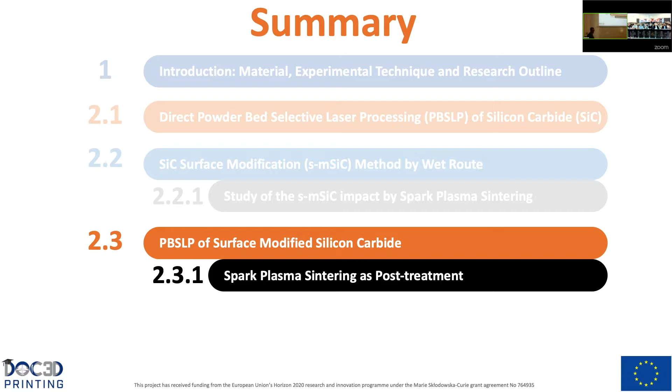We will also study the impact of this surface modification on the sintering behavior. And finally, regarding the experimental part, we will see the powder bed selective laser processing of the surface-modified silicon carbide, and we will use spark plasma sintering as post-treatment.

Then, the third part is the conclusion of the project. And finally, we will see some future prospects and perspectives that we have to face.

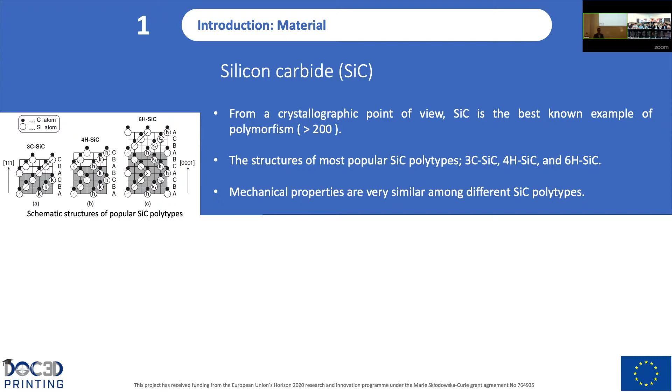So the material that we are using in this work is a ceramic material, silicon carbide, which from a crystallographic point of view is one of the best known examples of polymorphism, with more than 200 polytypes. The most popular structures of silicon carbide polytypes are 3C cubic, 4H hexagonal, and 6H hexagonal. The mechanical properties are very similar among the different silicon carbide polytypes.

Finally, the fabrication of dense silicon carbide parts is commonly done by a method called sintering, for example at Boostec, the company involved in this project, which generally reaches temperatures in excess of 2000 degrees. As you probably know, silicon carbide has unique characteristics such as high elastic modulus, low density, high thermal conductivity, and so on.

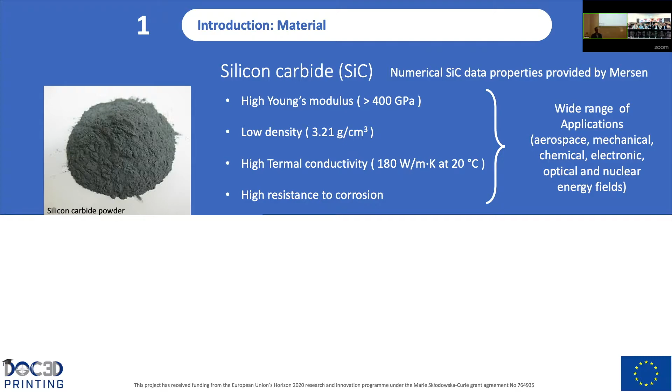This material has become more and more popular in the last decade due to these unique properties, finding a range of applications such as aerospace and the nuclear energy sector, for example. But for specific applications, component design can be improved by additive manufacturing. Among all the additive manufacturing methods, laser-based additive manufacturing is expected to fabricate complicated shapes of silicon carbide in fewer layers.

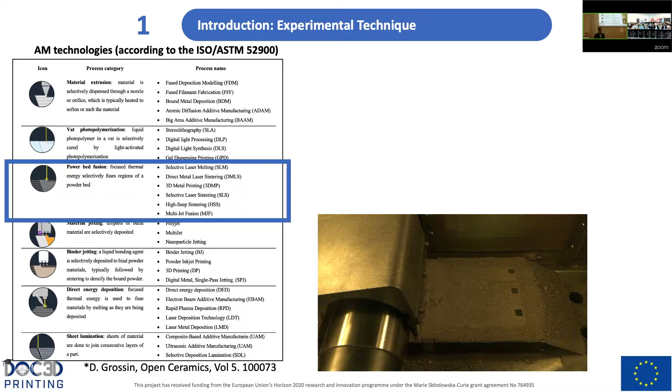In selective laser melting, the powder is transformed from the solid phase into a liquid and then solidifies. On the other hand, in selective laser sintering, particle coalescence - the powder aggregating by diffusion - is accomplished by firing at an elevated temperature.

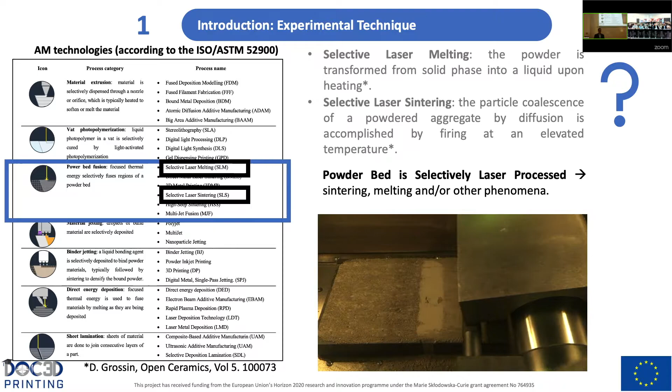In this process, we are not sure which term to use, because a powder bed is selectively laser processed, and both sintering, melting, and other phenomena could occur. For example, if we are using just silicon carbide, since it has no melting point, we should avoid the use of selective laser melting.

But if we are mixing our powder with, for example, silicon powder, which has a melting point, we shouldn't use selective laser sintering. So to avoid misusing these two terms, we decided to create a new term for this technique: powder bed selective laser processing.

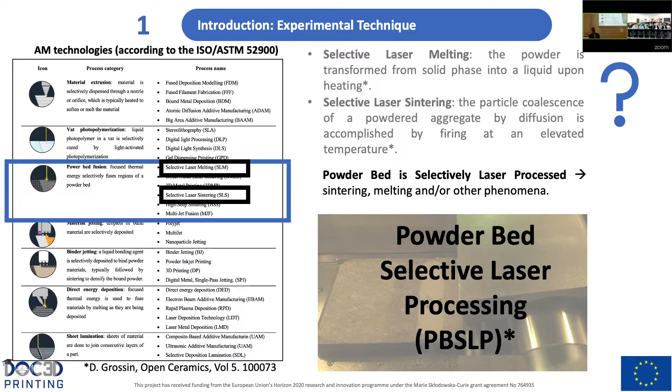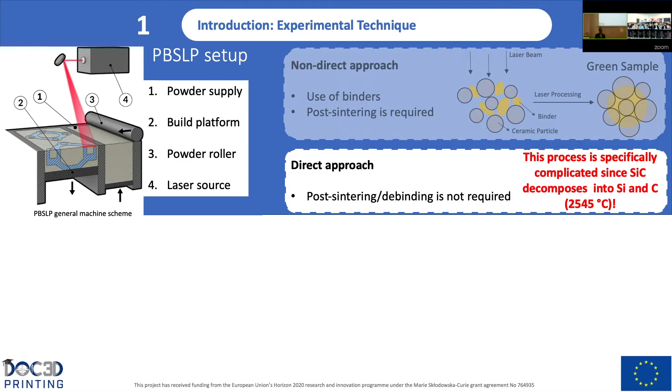But this process is specifically complicated since silicon carbide decomposes into silicon and carbon, as we saw, in excess of 2,545 degrees. Regarding the state of the art of this material and this technique, at present 70% of references are related to the non-direct method and 30% to direct methods.

If we look at the latest strategies followed by researchers and industry for additive manufacturing with powder bed selective laser processing of silicon carbide, initially they used a silicon and silicon carbide powder mixture. After the additive manufacturing process, they obtained a core of silicon carbide preforms.

After performing polymer infiltration pyrolysis of a phenolic resin, which is a precursor of carbon, they obtain a core of silicon carbide carbon preform. Finally, by carrying out liquid silicon infiltration, they obtain a final reaction-bonded silicon carbide.

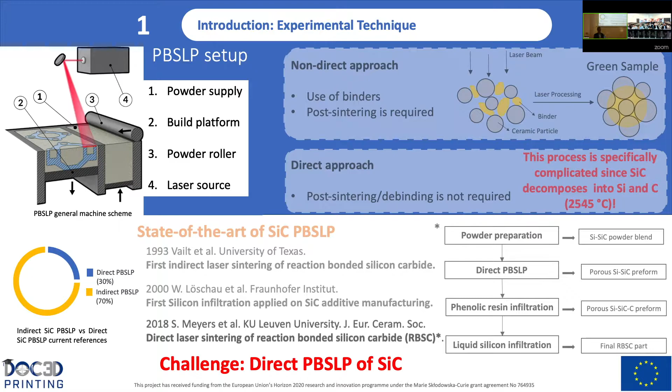So it's still a challenge to achieve direct powder bed selective laser processing of silicon carbide in the absence of additives, or, as we have seen, other initial powders. This is the latest strategy adopted by researchers and some industries.

Since we are obtaining at the end a composite of silicon carbide and reaction-bonded silicon carbide, we have a negative impact compared to, let's say, pure silicon carbide. And at the end of the process, we have some residual silicon content that, for example for some chemical applications, should be avoided.

So what's the original scientific approach of this PhD? Here, instead of using silicon powder, what we want to do is graft a preceramic polymer onto the surface of the silicon carbide.

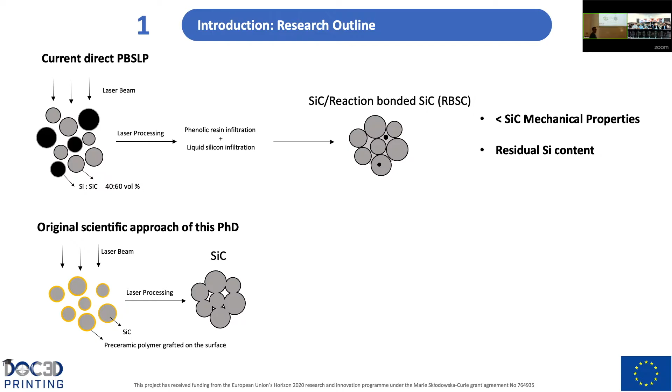So what are the features or characteristics that we need in this preceramic polymer? This preceramic polymer will create a stoichiometric silicon carbide coating via high temperature treatment in inert atmospheres. Then this grafted molecular layer will create a reactive interphase between the silicon carbide grains of the powder, facilitating diffusion and sintering. Next, this will produce the bonding of the ceramic particles without affecting the material phases of our parts.

The main goal of this PhD is the manufacturing of full-density silicon carbide complex shapes by direct powder bed selective laser processing, reaching the properties provided by Marie Skłodowska-Curie requirements of density, hardness, and flexural strength.

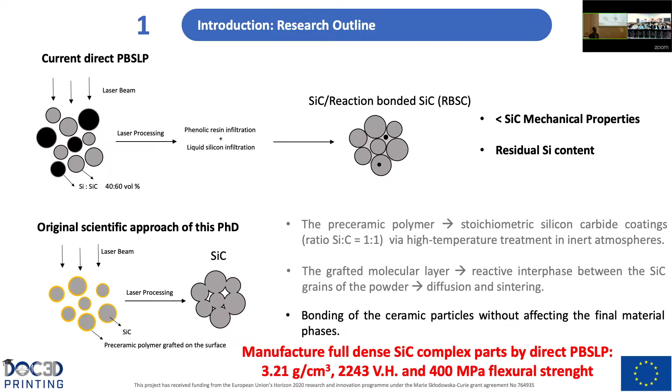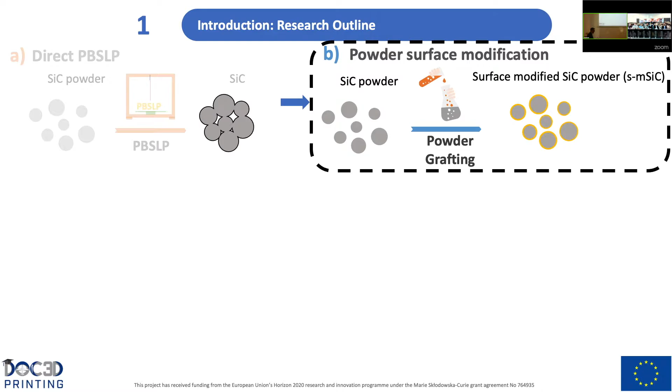So what's the research line that we are going to follow in this PhD? First, we are going to study and optimize the process parameters of powder bed selective laser processing. Then we will look at powder surface modification, with the study of the process parameters and optimizations. After that, we will study the sintering impact of the surface modification by spark plasma sintering, comparing silicon carbide with surface modified silicon carbide.

Finally, we will again use direct powder bed selective laser processing, this time to compare silicon carbide powder and surface modified silicon carbide powder, and we will again use spark plasma sintering as a post-treatment for the manufactured parts.

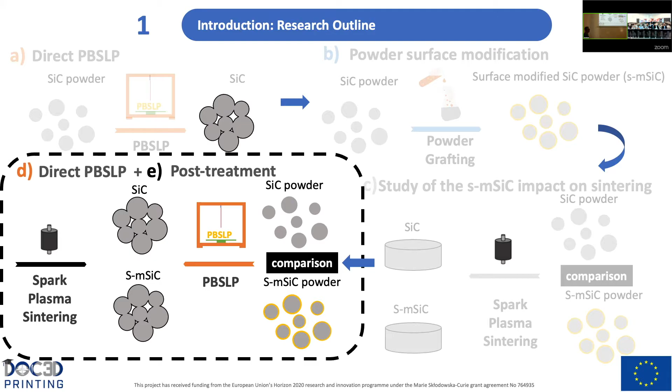Regarding the process parameters of powder bed selective laser processing, there are many parameters involved that have an important influence on the final relative density of the part. But there are 3 key points we need to focus on to assure a successful manufacturing process.

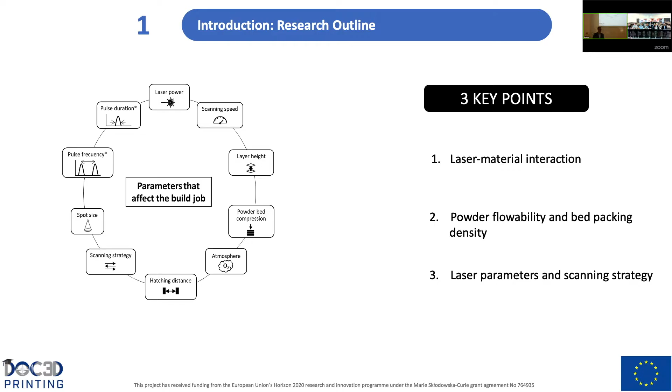The first one is laser material interaction. We need to assure that our material will be able to absorb the energy of the laser. In our case, we work in this wavelength. For metallic parts, we see good absorbance for this process. For other materials such as oxide ceramics, we don't have good absorbance, so researchers have adopted the strategy of adding additives to improve and enhance absorbance so we are able to work with them. For carbide ceramics, we have very good absorbance, so they are ready for this process.

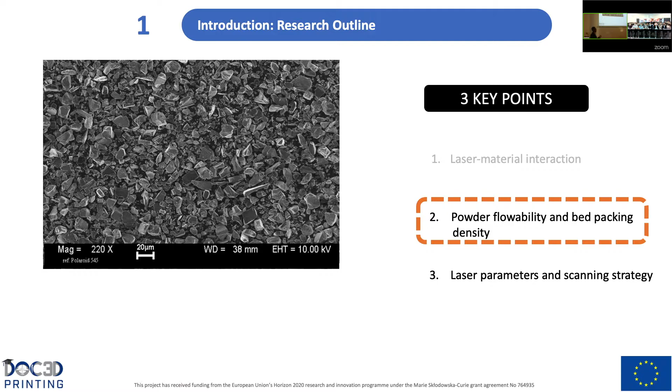And finally, of course, the laser parameters and scanning strategy. The 2 most important laser parameters are the laser power and scanning speed, because they determine the energy density that we are applying to the powder.

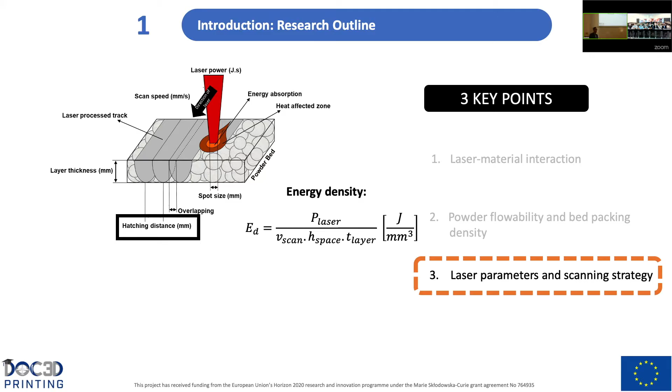Next is the layer thickness, which is the depth of each layer during the process. We need to assure we have a short distance so we interact through all the depth with the laser. And finally, the hatching distance, which is the distance between 2 adjacent laser beam tracks. We need to make sure we don't have too big a distance to avoid regions without treatment, but also that we don't have too much overlapping, otherwise we could have excessive heating and some decomposition.

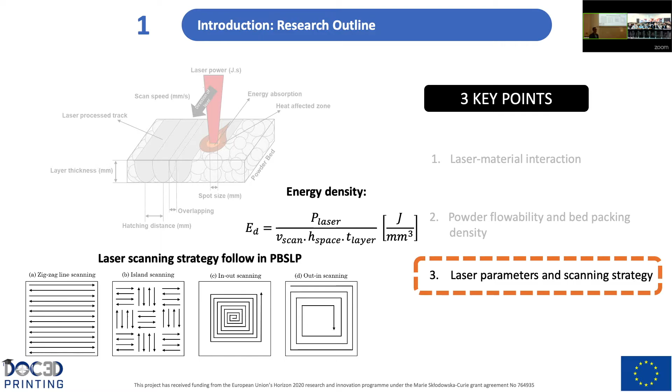And finally, of course, the laser scanning strategy followed in the process, because it determines the distribution of the energy density, and as we will see, it will have a very important role in the optimization of the process.

Now regarding the 3D printers we use in this PhD, this one is not used in this presentation. We use the Orlas Creator 3D printer, which has, as you can see, a circular setup. On the other hand, we have the Phenix Systems ProX, which has a back and forth configuration.

Two more important differences are the spot size, which is bigger here, and in the Phenix system we have a powder compaction system that, as we will see, will also have a very important role in the optimization of the process.

Now regarding the first experimental part, the optimization of the parameters of the powder bed selective laser processing, we were using 20 micrometer silicon carbide powder. All the silicon carbide powder used in this thesis has been supplied by Mersen.

As an optimization criteria of the parameters, we want to achieve the highest reproducibility of intact parts with the highest relative density at the end of the process. Here we can see in black the constant parameters of the process, and in red the parameters of the study that we delimited in a previous study.

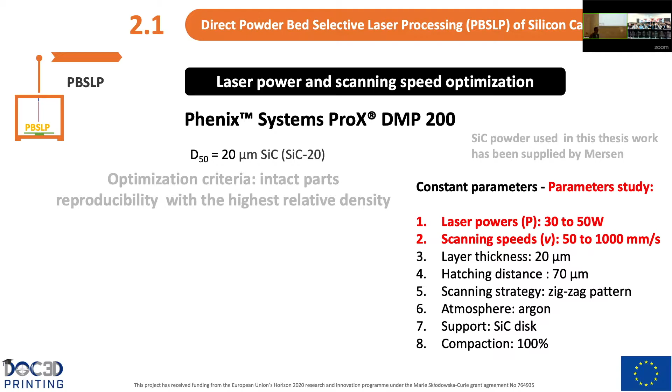Moreover, here in the platform on the 3D printer, in the support, we glue a silicon carbide disc, a support for the manufacturing, to avoid the steel-ceramic interaction and be able to achieve a good manufacturing of the first layer, which is crucial for the process.

So then, regarding the optimization of this kind of strategy, we decided to keep the other parameters constant to just see the effect of the scanning strategy during the process. We use 4 different kinds of strategies. The first one is concentric in-out, following this path.

Then island scanning with hexagonal shapes, following this path. Linear scanning, following this path - each time the laser arrives at the end, it's turned off and comes back to the beginning, repeating the process. And finally, the zigzag, following this path.

So regarding the experimental results, we can observe how different the process is just by modifying this kind of strategy.

Firstly, in the concentric in-out strategy, we can observe a very specific defect pattern. This is because each time the laser changes direction, there is a heat concentration, producing some decomposition.

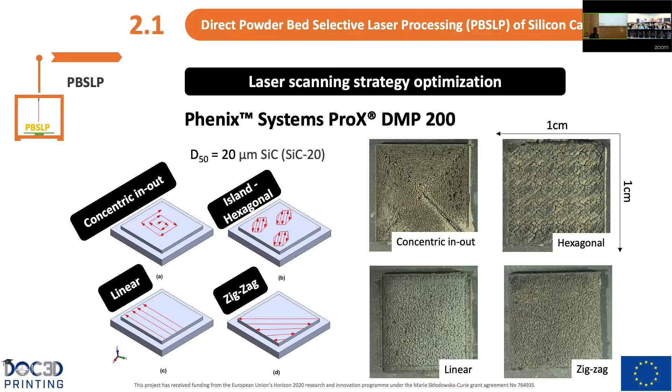Next, regarding the optimization of layer thickness and hatch distance, we achieve good reproducibility and good relative density by using parameters of 20 micrometers layer thickness and 35 micrometers hatch distance, respectively.

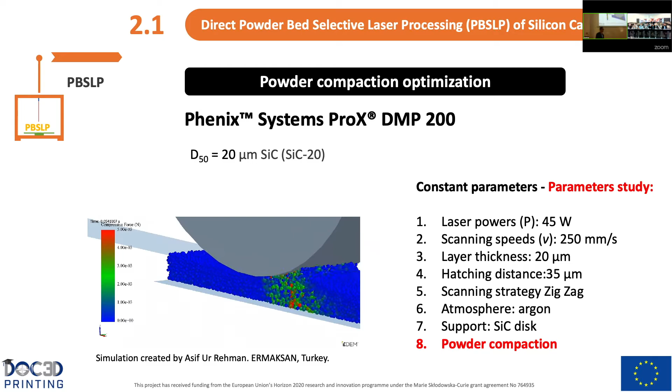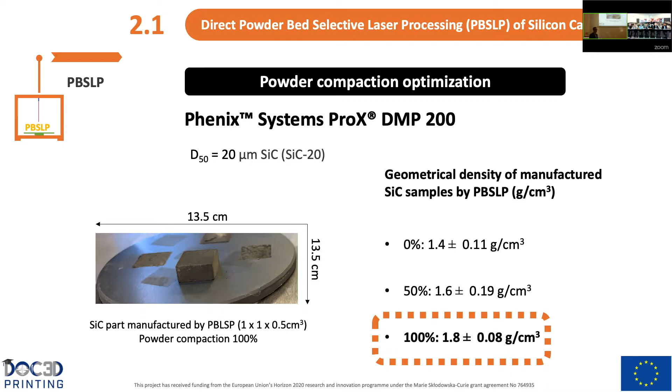Finally, we have to optimize the powder compaction. To do this, we measured the geometrical density of the sample after manufacturing. We used 3 different powder compactions. Here, 100% means that if the layer thickness is 20 micrometers, we compact the full 20 micrometers; in another case only 10 micrometers, and in another, nothing. We obtained the best results in terms of geometrical density with 100% compaction.

Now that we have optimized all the parameters individually, we are able to manufacture samples with high reproducibility and the highest relative density.

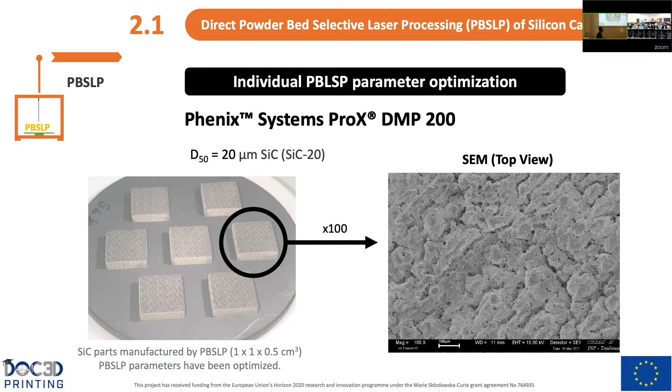Regarding the microstructure of the material, we cannot see clusters of particles or melting regions, nor can we observe specific defect patterns. If we zoom in, we can observe some porosity, but compared to our previous parameters—laser power 45 instead of 38, scanning speed 250 instead of 100, and zigzag strategy instead of hexagonal—we can observe a reduced porosity with the optimized parameters.

In numerical values of density, we are obtaining 81% relative density versus 53% relative density previously.

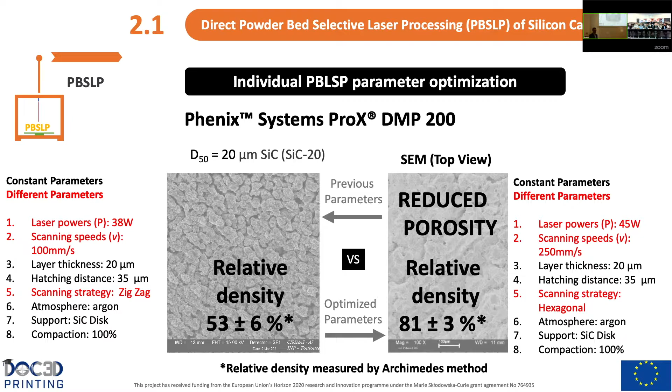But we are also observing some silicon due to the decomposition of the process. By performing the phase composition analysis using the Rietveld method, we can see that regarding the silicon carbide phase, we obtain qualitative similarities between the initial silicon carbide powder and the silicon carbide after the manufacturing process.

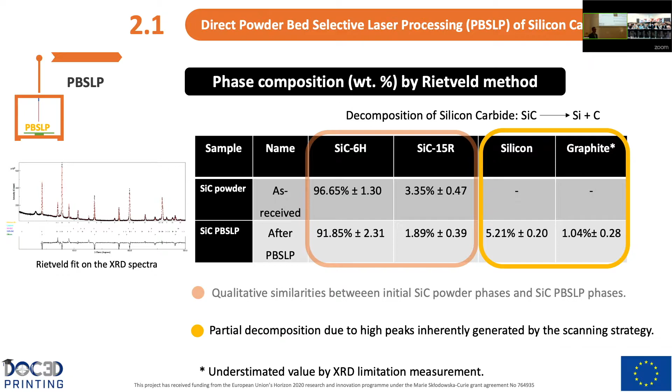We also observe some decomposition into silicon and graphite at the end of the process, due to partial decomposition caused by high peaks inherently generated by the scanning strategy, which we cannot modify. We will address this in the future perspectives and challenges.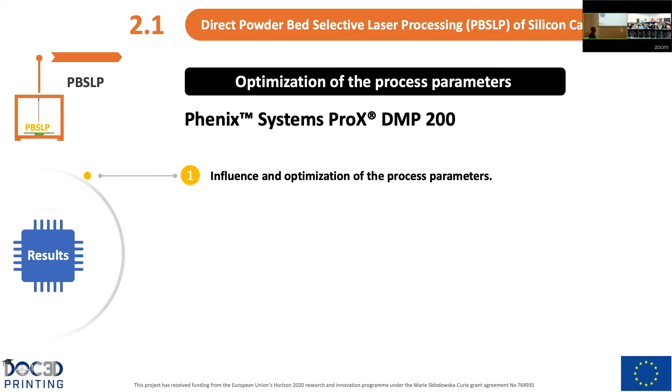From this part, we obtain the following results: we have studied and optimized the process parameters of powder bed selective processing, and studied the effect of the scanning strategy. We have obtained 81% relative density silicon carbide parts. We observed some partial decomposition during the process due to peak inertia generated by the scanning strategy. Finally, we confirm the process viability, as we are now able to manufacture silicon carbide components.

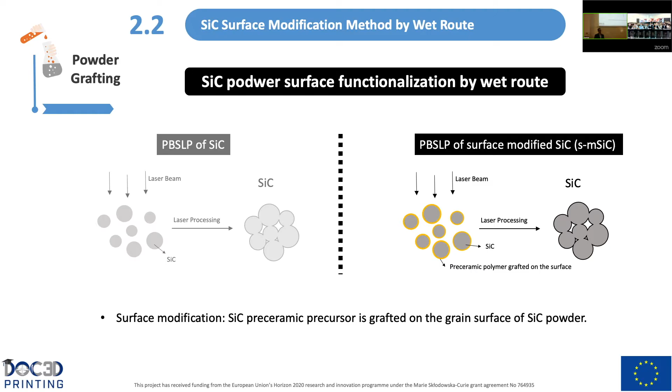Now it's time to introduce the technical scientific approach of this PhD. Having optimized this process, what we want to do is graft a pre-ceramic polymer onto the surface of the silicon carbide powder. For this, we need to perform a surface modification in which the silicon carbide pre-ceramic precursor is grafted onto the grain surface of the silicon carbide powder. This is a potential method to improve the sintering behavior of this ceramic material.

So the ceramic precursor that we are using in this work is the polycarbosilane, which has a commercial name of CVD4000. The characteristic of this commercial ceramic precursor is that the CVD4000 is a carbosilane oligomer, which is used as a molecular precursor in the growth of silicon carbide by chemical vapor deposition.

Moreover, this is a liquid compound, which is flammable in air and moisture sensitive, and highly soluble in toluene, and it's as well handled in an argon atmosphere. And finally, it has a silicon-carbide ratio of 1:1, suitable to form a pre-ceramic polymer in a silicon carbide synthesis.

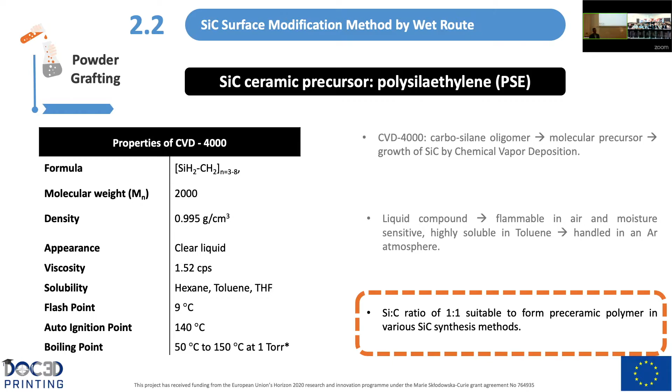So now, what we want to do is know the mass of the polycarbosilane oligomer that we need to graft onto the powder. For that, we develop the following model hypothesis. Firstly, the silicon carbide particles are mono-dispersed and spherical.

Then, the formula of the polycarbosilane has an index of 5. Next, the surface occupied by one grafted molecule is the surface projected by a molecule attached perpendicularly to the silicon carbide surface. And finally, the polycarbosilane polymer can only be attached on the silicon carbide surface and not on a fresh molecular polycarbosilane.

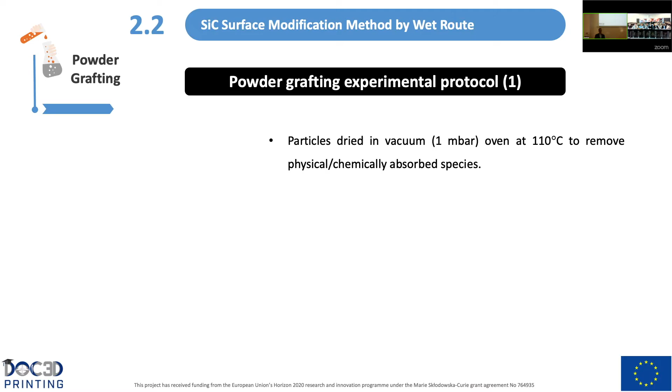So now regarding the powder grafting experimental protocol, by reviewing the literature, we use the following protocol. Firstly, the particles are dried in a vacuum oven at 110 degrees to remove physically and chemically absorbed species.

Then this suspension of polycarbosilane, toluene, and silicon carbide is subjected to 5 minutes of manual agitation to improve the oligomer solubility and homogeneity, and it's subjected as well to an ultrasound bath for 10 minutes at room temperature.

And actually, regarding the expression of mass, it's very important not to use an excess of polycarbosilane during the process. Why? Because this could decrease the powder flowability.

So we wouldn't be able to use this powder, this ceramic, in an additive manufacturing process such as powder bed selective processing. Moreover, this could increase the specific surface area, producing a change in the morphology, and the coupling agent would hardly penetrate into particle agglomerates.

Next is the wet functionalization. Here we are going to transfer the suspension into a vacuum gas manifold under argon and subject it as well to magnetic stirring for 1 hour at 60 degrees.

Following this step, the suspension is again transferred to a rotary evaporator, and here the toluene is removed by evaporation under moderate vacuum conditions at 60 degrees. And actually after this step, we can take our silicon carbide back as dry powder.

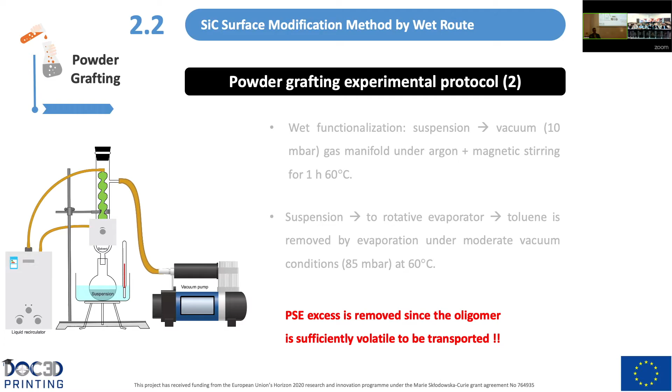But actually, if we are using some excess of polycarbosilane, it won't be a problem because it will be removed since the oligomer is sufficiently volatile to be transported.

Regarding the grafting process parameters' influence, because for example we were saying we were using ultrasound, we were using 60 degrees of temperature for the process, here we were using infrared characterization to know and study the grafting efficiency of the process.

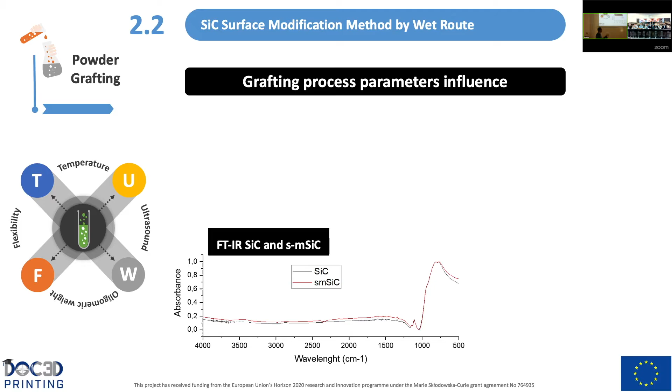But actually, if we focus on the infrared spectrum of silicon carbide as received and surface modified silicon carbide, in this region, since we are using a very weak oligomer content, we cannot detect the signal of this oligomer, and yes, we can see the silicon carbide peak.

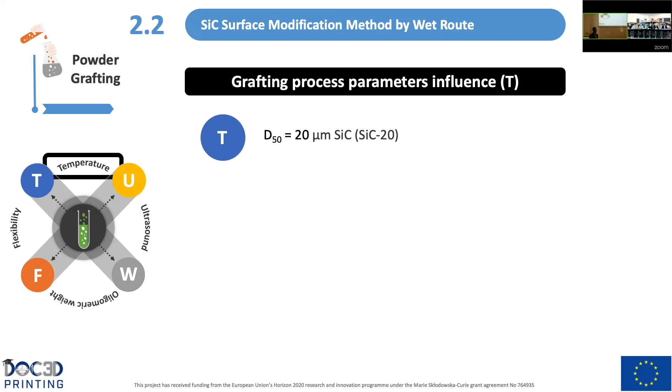So regarding the optimization of temperature, here we were using silicon carbide powder of 20 micrometers, and we were using 4 different temperatures: 80, 60, 40 degrees, and room temperature.

And effectively, we can observe that in the silicon carbide powder, we can observe this peak after the process. So actually, regarding the intensity ratio, that's the ratio between the silicon carbide peak intensity and the silicon-hydrogen grafting peak intensity, we can see that at temperatures of room temperature and 40 degrees, we cannot observe an important increase.

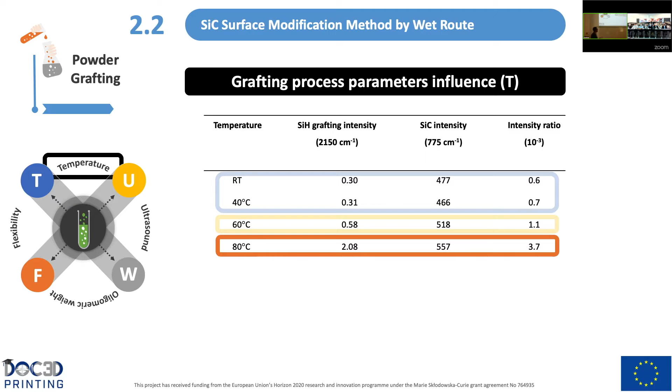By increasing the temperature to 60 degrees, we observe an important increase in intensity ratio. But by increasing to 80 degrees, compared to the other values, we observe a huge increase of the intensity ratio. So why aren't we using 80 degrees instead of 60 degrees?

Because after the surface modification process, at 60 degrees we have the silicon carbide in powder form, but at 80 degrees, instead of having the silicon carbide in powder form, we are forming silicon carbide plates because the temperature leads to some cross-linking. Since we don't have the ceramic in powder form, we are not able to use it in the powder bed selective process.

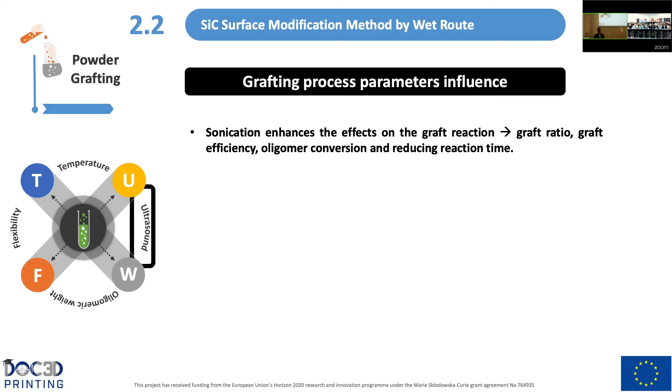So we also optimized more parameters. For example, regarding ultrasound, we saw that sonication enhanced the effect on the grafting by increasing the graft ratio, the graft efficiency, the oligomer conversion, and reducing the reaction time.

Next, we studied that a large excess of oligomer grafted and polymerized on the surface of the powder decreases the grafting performance, as is reported in literature.

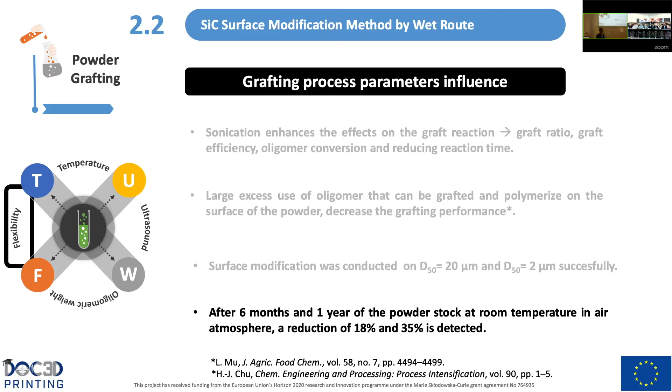Regarding the flexibility of the process, we conducted surface modification of two different silicon carbide powders, 20 micrometers and 2 micrometers. Finally, after 6 months and 1 year of powder storage at room temperature in air atmosphere, a reduction of 18% and 35% was detected in the grafting efficiency.

So regarding the results of this part, we have studied the effect of the process parameters: temperature, ultrasound, and oligomeric weight. We used infrared characterization to study the optimal conditions to conduct this process.

Next, we observed that the surface modification shows good reproducibility. We performed this surface modification on 20 and 2 micrometer silicon carbide powder. The surface modified silicon carbide powder does not allow a big delay in time in its application. Finally, this is a method that will potentially improve the sintering behavior of the silicon carbide, as we will see in the following section.

So now it's time to study the impact on the sintering behavior of the powder from this surface modification. For this, we are going to use two different powders, 2 micrometers and 2 micrometers silicon carbide powder after the surface modification, and evaluate the sintering behavior.

We are using spark plasma sintering because this is a favorable method for sintering silicon carbide, as reported in literature, and it provides fast heating and short sintering times.

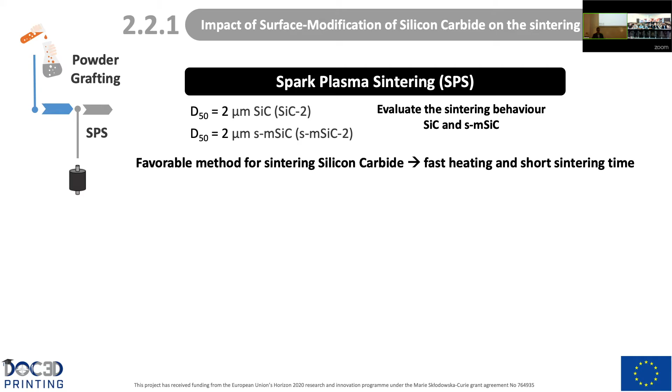This is the setup for the sintering. It's a sintering technique which uses pressure driving powder compaction, in which a pulsed direct electric current passes through the sample. With the powder, we are going to manufacture silicon carbide pellets with 6 mm diameter and 2 mm thickness.

To understand what we have in the graphite die, here is the graphite die. First we place a graphite foil, then we place a graphite die. After we put the silicon carbide or the surface modified silicon carbide inside the graphite die, and finally another graphite die on top.

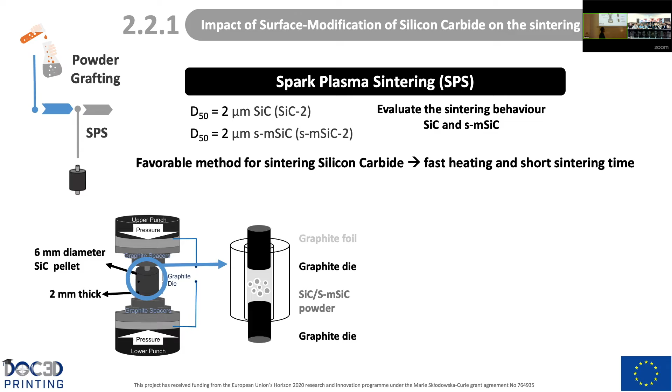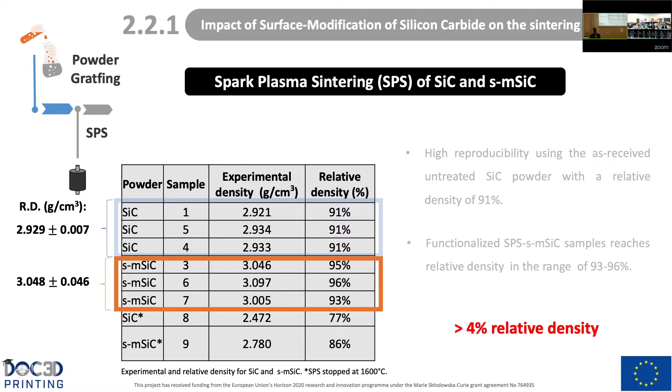Now regarding the relative density of silicon carbide versus surface modified silicon carbide, we observe high reproducibility using the powder as received, with a relative density of 91%. On the other hand, using the functionalized surface modified silicon carbide, the sample reaches relative density in the range of 93 to 96%, very close to full densification. So we are increasing the relative density by an average of 4% by using surface modified silicon carbide.

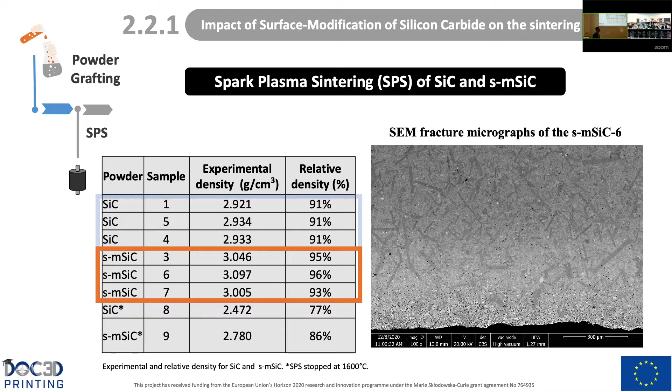Regarding the microstructure of the material, we observe some porosity increasing at the edges, and we can see brighter and darker areas. Comparing with the microstructure of the surface modified silicon carbide, again we observe porosity increasing at the edges of the part, and again brighter, darker areas, but we observe similarities between the two microstructures. If we zoom into this part and perform EDS scan analysis to determine what these brighter, darker areas are, we cannot observe any change in the composition.

So actually what we have here are different crystallographic orientations of different silicon carbide polytypes.

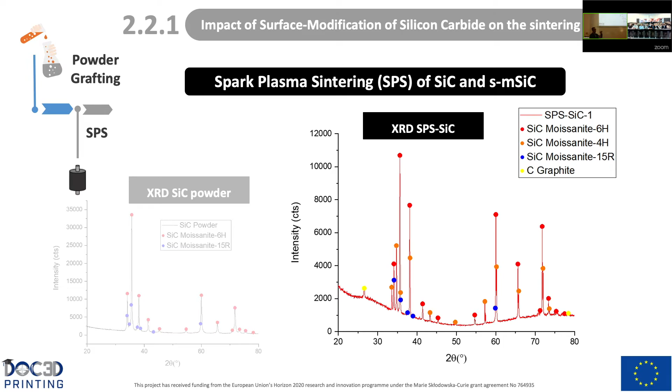Now regarding the XRD spectrum to know the phases of this material, here again the powder as received. If we compare with the silicon carbide after spark plasma sintering, we can observe moissanite 6H and 15R raw material like the powder, and some graphite due to contamination of the graphite die that we are placing in the beginning. But actually here we observe a new phase, silicon carbide 4H, that is not present in the powder.

If we compare with the surface modified silicon carbide after spark plasma sintering, again 6H and 15R raw material like powder as received, graphite due to contamination, but again 4H is present. So actually we have similar material phases present in both powders.

So regarding the phase composition, again by Rietveld method, here we observe similarities with the silicon carbide powder and surface modified silicon carbide powder. And effectively, for the silicon carbide and surface modified silicon carbide after the spark plasma sintering, we are observing some transformation from 6H to 4H. But actually we are not able to observe this phenomenon in powder that we stopped at 1,600 degrees.

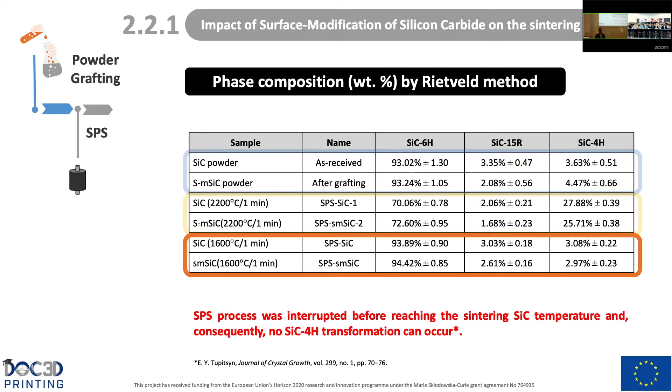Actually, here we cannot observe this transformation from 6H to 4H. Why? Because actually the spark plasma sintering process was interrupted before reaching the sintering silicon carbide temperature, and consequently no silicon carbide 4H transformation can occur, as it is reported in detail.

So now we are going to use the silicon carbide and surface modified silicon carbide experiment that we stopped at 1,600 degrees to study the sintering of both powders. So for this, here we can see the profile of temperature and displacement, and actually a change in the displacement curves, as we can see here, means dimensional shrinkage of the powder.

Specifically for the silicon carbide powder, this is happening at 1,240 degrees, and for the surface modified silicon carbide at 1,060 degrees. So actually, we observe that the sintering process initiation has a difference of 180 degrees. But why? What is happening here?

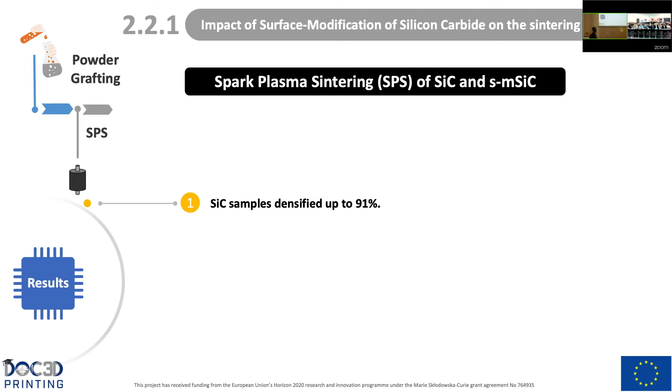So from this part, we can obtain the following results. First, we have densified a silicon carbide sample up to 91%. On the other hand, surface modified silicon carbide densified up to 96%. Remember, with the same spark plasma sintering conditions.

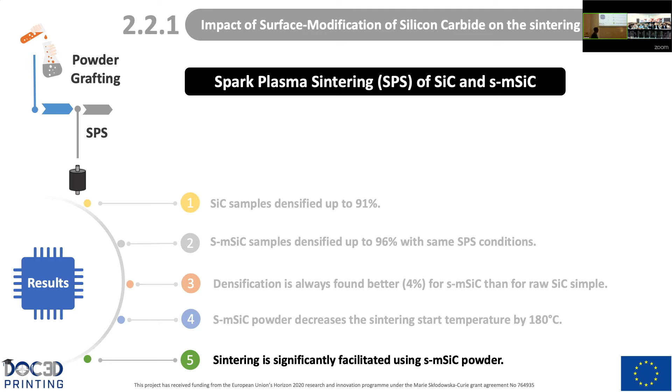Next, the densification is always better, in a range of 4%, for surface modified silicon carbide compared with the silicon carbide sample. And actually, the surface modification decreased the sintering start temperature by 180 degrees. And finally, the sintering is significantly facilitated using surface modified silicon carbide.

So now it's time to compare with the additive manufacturing technique, the silicon carbide and the surface modified silicon carbide. So regarding what we've seen, effectively with the surface modification, we are enhancing the sintering behavior.

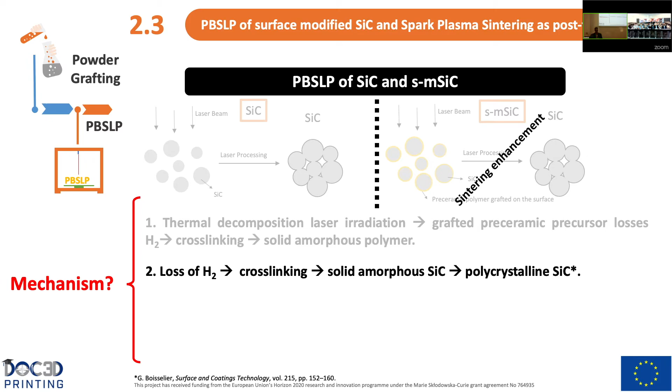So what's the mechanism? Why do we expect to improve the process with the surface modified silicon carbide in the selective laser sintering process? Because actually, by thermal decomposition due to laser irradiation, we'll create the grafted preceramic precursor. We will lose hydrogen, leading to cross-linking, and we create a solid amorphous polymer. Then, by continuing this loss of hydrogen, leading again to cross-linking, we will form a solid amorphous silicon carbide that will be converted into polycrystalline silicon carbide, as it is reported in literature.

Next, this grafted molecular silicon carbide hydrogen layer will create a reactive interface between silicon carbide polymer grains, facilitating diffusion of sintering. And finally, this will produce the bonding of ceramic particles without affecting the material phases, making the debinding process unnecessary and actually fulfilling the original conversion into silicon carbide.

So regarding the parameters that we use for the silicon carbide to do this comparison, here are some of the parameters, and maybe you're asking why we are using 50 instead of 45 as we used in the beginning. Actually, we can discuss this after, but at this point, we hadn't started yet the collaboration with the colleagues from Turkey, and we found this value to be the best one for the process.

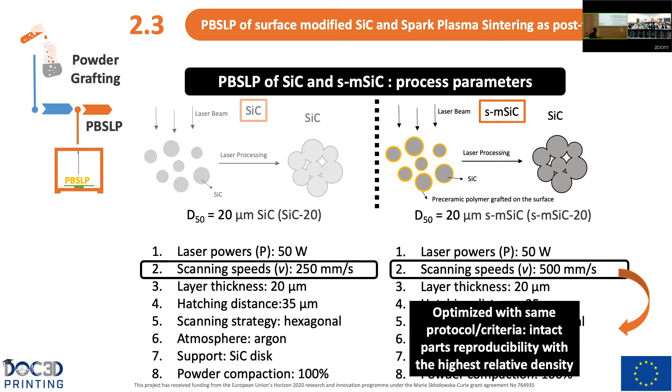Comparing the surface modified silicon carbide, here we have exactly the same parameters, except for the scanning speed, where we are using 500 instead of 250. Why? Because we were following the same protocol criteria to optimize the parameters. And we observed that by using this scanning speed instead of the other one, we were reaching parts with highest reproducibility and highest relative density. In numerical values, actually, 65% relative density versus 71% relative density.

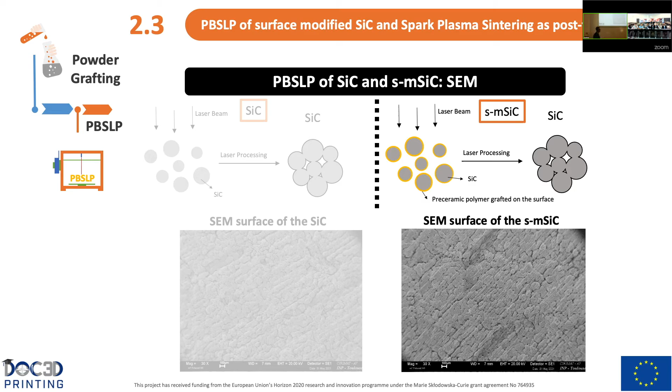Comparing with the surface modified silicon carbide, again, no cluster of particles, no melting, no specific defect patterns. So actually, we have microstructural similarities at this scale.

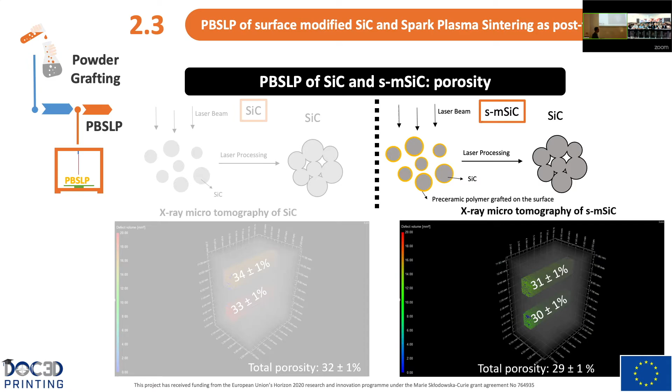Regarding the porosity of the silicon carbide after the process, by performing X-ray microtomography, we obtain a total porosity of 32%, compared with interior values of regions of this part, 33 and 34%, very close values. In comparison, the surface modified silicon carbide has a total porosity of 29%, with interior volumes of 30 and 31%. So here we are improving, decreasing the porosity by 3% by using surface modified silicon carbide. But remember that we are using 500 millimeters per second instead of 250 millimeters per second.

I want to highlight that by using this scanning speed for the silicon carbide without surface modification, we will obtain parts without reproducibility and with a lot of defects.

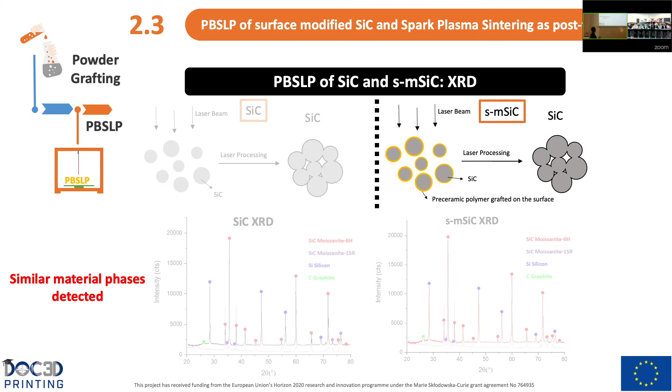Here we have the phases of the material, the XRD spectrum. For the silicon carbide, again as we have seen, two phases like the powder as received, and two due to the decomposition. Regarding the surface modified, again two like the powder as received, and two phases due to the decomposition. So actually here we have similar material phases in the respective parts.

So the next step, once we have performed the additive manufacturing method and obtained our parts, we are going to use spark plasma sintering as post-treatment. Why? Because actually we can use this post-treatment to treat complex shapes.

Here we have the setup of the machine. Again, we manufacture 20mm diameter silicon carbide and surface modified silicon carbide pellets with powder bed selective laser processing, with 2mm thickness. And for the graphite die, we are going to fill the empty space with graphite powder.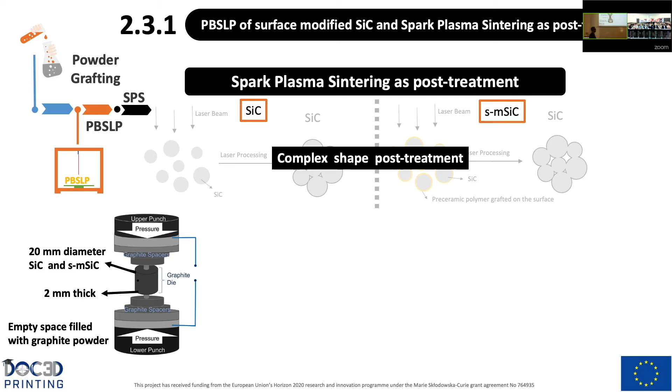To zoom in on the graphite die, here again we are going to place a graphite foil, then a graphite die. As we have seen, we are going to put some graphite powder. Then we will place the silicon carbide or the surface modified silicon carbide part manufactured by additive manufacturing. Then again, some graphite powder, and finally the graphite die. We are going to follow exactly the same experimental path that we used in the previous experiment.

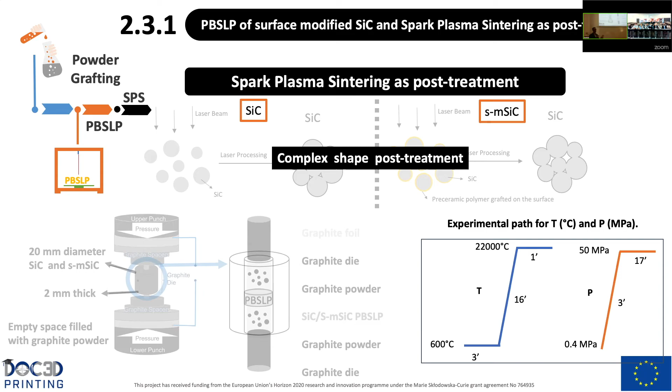Regarding the microstructure of the silicon carbide after post-treatment, here we can observe a reduced porosity comparing this sample with the previous one manufactured by additive manufacturing. Very similarly, for the surface modified silicon carbide we can observe a reduction in the porosity as well. So actually here again we have some microstructural similarities at this scale.

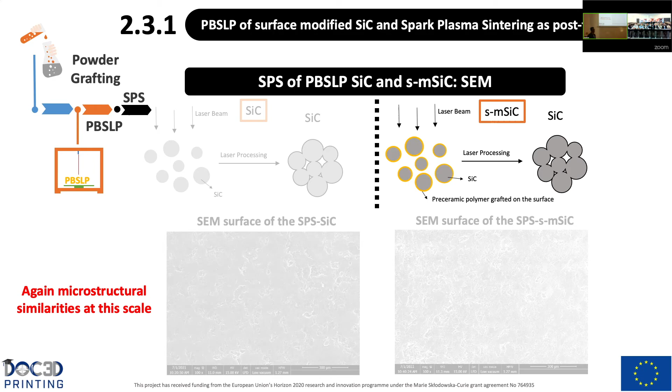Next point is to study the porosity after the post-treatment, again by using X-ray tomography. So here we are obtaining 27%. If we compare before spark plasma sintering, it was 32%. So we are decreasing the porosity by 5%.

And regarding the surface modification, 21%. Remember before it was 29%, so here we have a reduction in porosity of 8%. So comparing the surface modified silicon carbide and silicon carbide, we have a 5% difference in porosity, a similar value to what we obtained before. With spark plasma sintering, we are able to decrease the final porosity of the sample by up to 8%. Remember, we can treat complex shapes of silicon carbide.

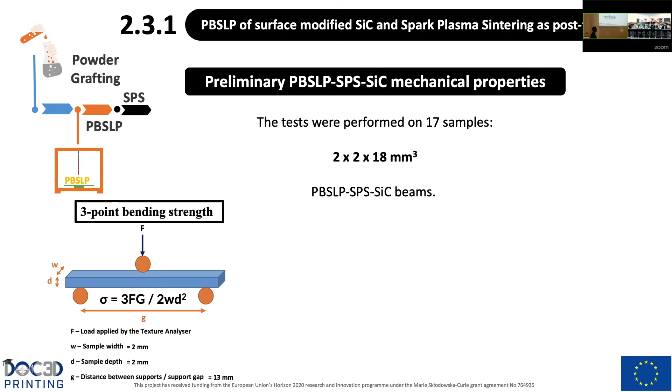So next, we performed some preliminary mechanical properties testing, but we only had time to test the silicon carbide, not the surface modified silicon carbide. We used 17 samples with specific dimensions. First, we wanted to study the flexural strength by using 3-point bending tests.

We obtained a value of flexural strength of 137 megapascals, with a porosity of 27% and a silicon content of 15%.

If we compare this value with the last strategy we were explaining in the first slide, the additive manufacturing by laser sintering of reaction-bonded silicon carbide, we obtain a similar value, despite the fact they don't have any porosity. They obtain full density values with similar content. So probably by decreasing this porosity, we could get closer to or even achieve a better flexural strength.

But actually, if we compare with the value provided by Mersen Boostec, we are still a bit far, and we have to work in this sense.

Regarding the Vickers hardness, here we were using an indentation load of 4.90 newtons, and actually we obtained a value of 2,200, with a porosity of 27% and silicon content of 15.

Again, if we compare this value with the same last strategies adopted by researchers, they are obtaining a similar value, but a bit smaller, probably because remember they are obtaining a composite of reaction-bonded silicon carbide. So as we said, this has a negative impact compared to pure silicon carbide at the end of the process.

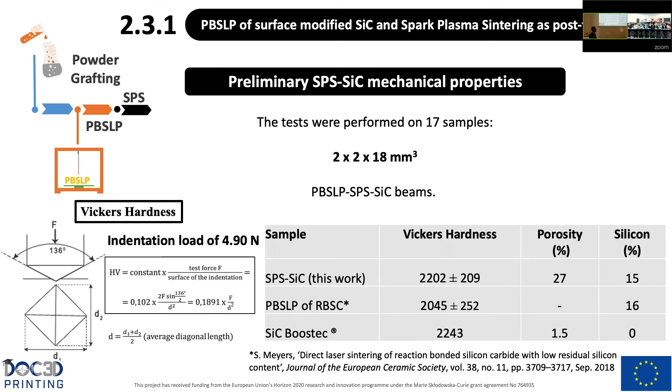And regarding the Vickers hardness provided by Mersen Boostec, here we have a very similar value.

So from this part, the results that we can obtain is that we have obtained silicon carbide and surface modified silicon carbide with powder bed selective laser processing with 3% final dimensional specification.

Next, we have observed a 2-factor reduction of the silicon phase due to energy density decrease. This is in accordance with the sintering initiation reduction that we have seen in previous experiments.

We use spark plasma sintering to further densify the samples, around 80%.

And finally, the silicon carbide, after additive manufacturing and post-treatment, exhibits a Vickers hardness of 2,200 and flexural strength of 137 megapascals. So regarding the conclusion of the experimental parts of this project, we have studied and optimized the process parameters.

Of powder bed selective laser processing. Now we can confirm the process viability because we are able to manufacture complex silicon carbide shapes by this technique without post-treatments, without additives, and without binders in the initial powder mixture.

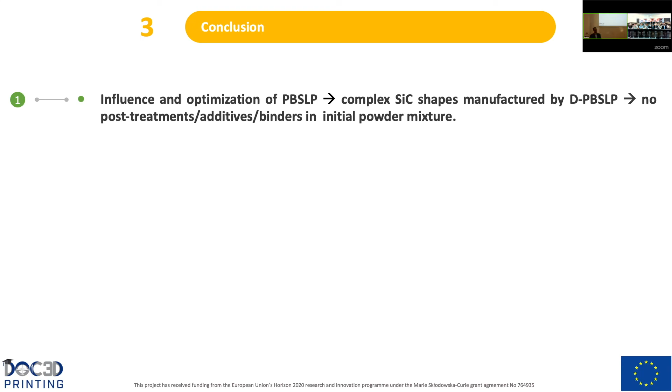Next, we have studied and optimized the wet process parameters to graft the preceramic precursors onto the silicon carbide surface. We have studied and seen the enhancement of the sintering behavior due to this powder modification.

For this, we use spark plasma sintering to densify up to 91% the silicon carbide powder, and up to 96% the surface modified silicon carbide by spark plasma sintering with the same conditions.

And finally, we have manufactured surface modified silicon carbide by powder bed laser processing, post-treated by spark plasma sintering, obtaining a 5% inferior porosity compared to silicon carbide, and a 2-factor decreased proportion of silicon phase, because remember we are decreasing the energy density.

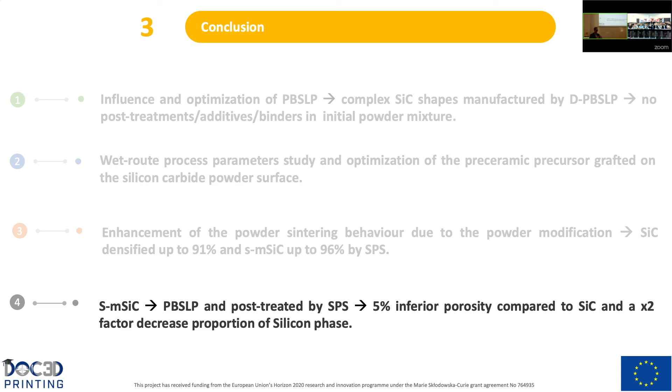So regarding the future prospects and perspectives of this project, first, the powder optimization. Actually, we were using a cell morphology in the initial powder mixture that decreased the powder formability on the packing bed.

So in this regard, what we have to do is, for example, spray drying, which shows the possibility of atomizing silicon carbide powder with a bigger final diameter and spherical shape.

Actually, we are performing some preliminary experiments, and now we are able to obtain silicon carbide powder with a final size of 35 micrometers, and of course, spherical morphology.

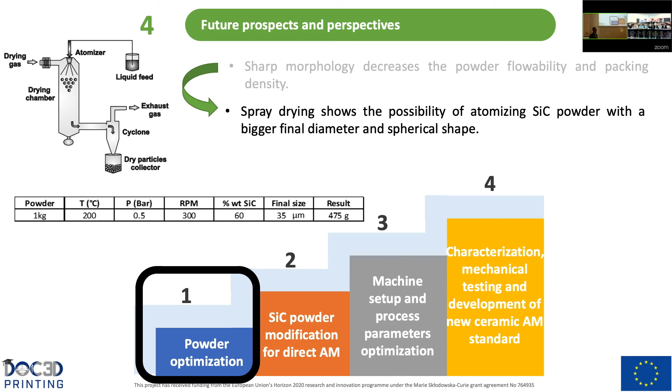Regarding the silicon carbide powder modification, here we are using wet routes, which require use of solvents and post-drying steps that are often energy intensive.

And actually, here we should explore dry routes, such as vapor-phase infiltration, because they don't require use of solvents or post-drying steps. And this vapor-solid interface has no surface tension, facilitating conformal modification of all exposed surfaces.

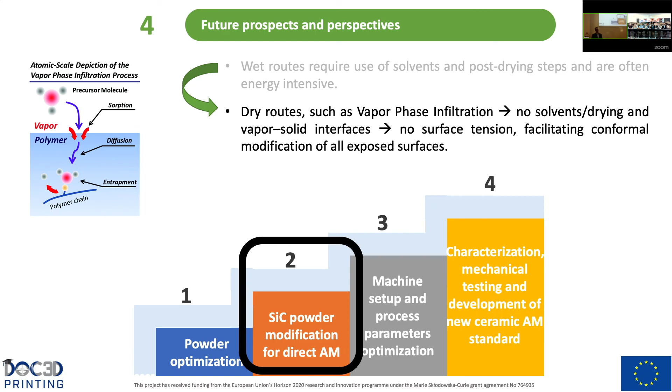Next, regarding the machine setup and process parameters optimization, here we have observed some decomposition and formation of defects during the process due to high temperature gradients induced on the surface by material-laser interaction and the scanning strategy.

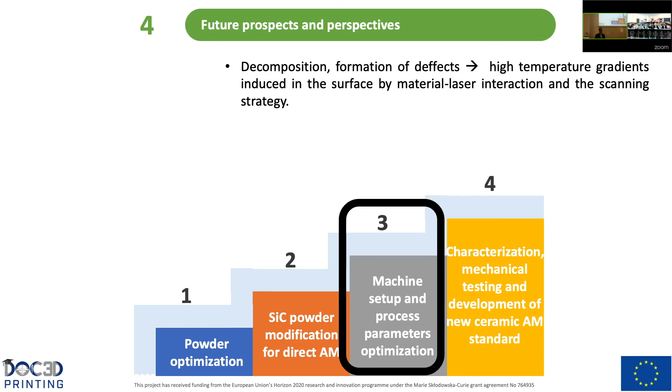So in this regard, we need to design a new scanning strategy and a new 3D printer adapted to ceramic materials with an adequate preheating system.

And moreover, we should elaborate more complex shapes to know and study the limits of spatial resolution and density of this technique.

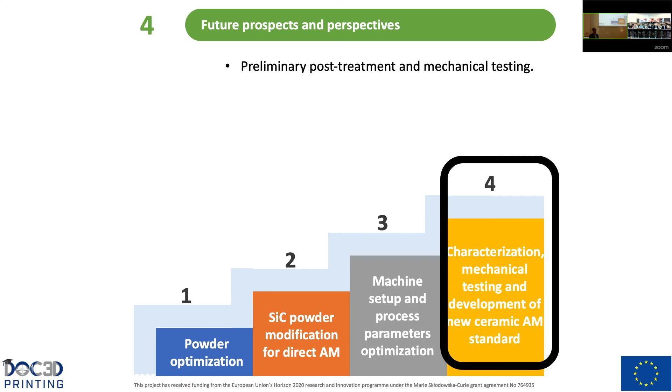And finally, regarding the characterization and mechanical testing, we performed just some preliminary post-treatment and mechanical testing. So here, of course, we need to measure the mechanical properties, because we don't have time data, of the surface modified silicon carbide after the additive manufacturing process and spark plasma sintering.

And we should create a new standard of ceramic additive manufacturing, because at present we have no information.

And moreover, we should perform more accurate analysis of the microstructure, such as to know if we have an isotropic or an anisotropic part, to study the surface roughness and transmission electron microscopy.